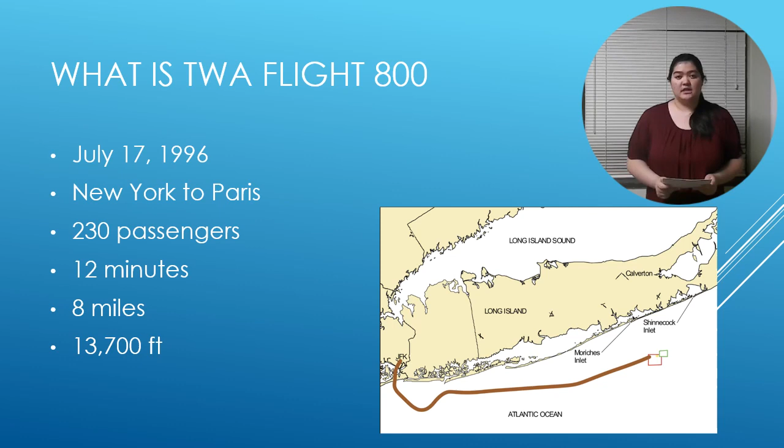The center section, shown in red, fell first. The yellow section, the forward fuselage, soon followed. Finally, the rest of the plane, shown in green, struck the water.

Newspapers across the country reported on the incident, especially the witness reports stating how a streak of light hit the plane just before it fell. A 10-month diving operation recovered 95% of the plane remnants. In order to decipher what had happened, the plane was reconstructed to the best of its ability.

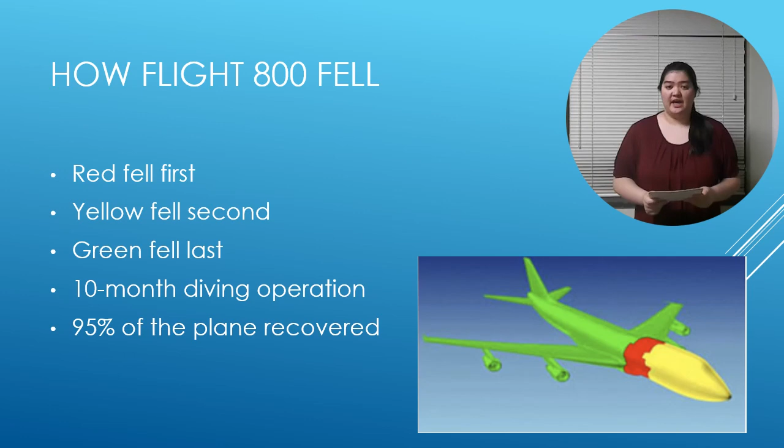The National Transportation Safety Board, or NTSB, launched its investigation as soon as the pieces of the plane were accessible. The NTSB initially reported 3 possible causes of failure. The first was structural failure and decompression. This was quickly ruled out due to there being no corrosion, metal fatigue, or structural faults.

The second possible cause was the detonation of a bomb or missile. However, there was no evidence to support this theory either. There were no holes indicating the penetration of a missile, and no localized area had any more severe damage than another. While there was trace residue found in the plane, this could quickly be explained by past uses of the airplane. And the light trail witnesses saw could have been burning fuel falling from the plane.

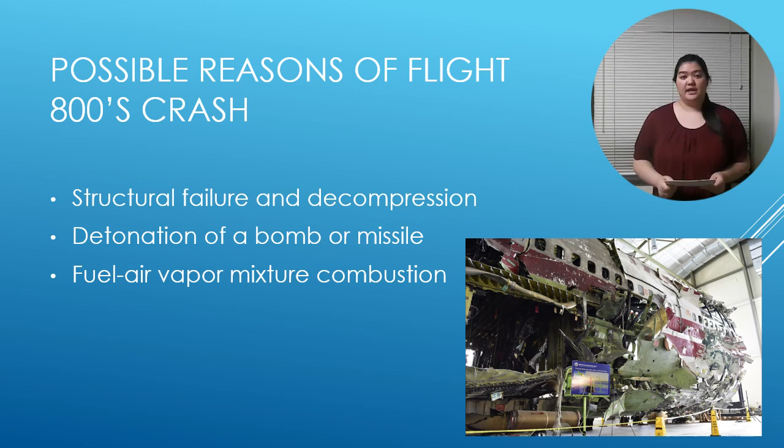The last theory was fuel-air vapor mixture combusting in the wing. The wreckage displayed that pieces of the center wing tank were ejected first. Overpressure in the tank was the first in the sequence of failure. This overpressure was deduced to be caused by the fuel-air vapor mixture combusting in the wing tank.

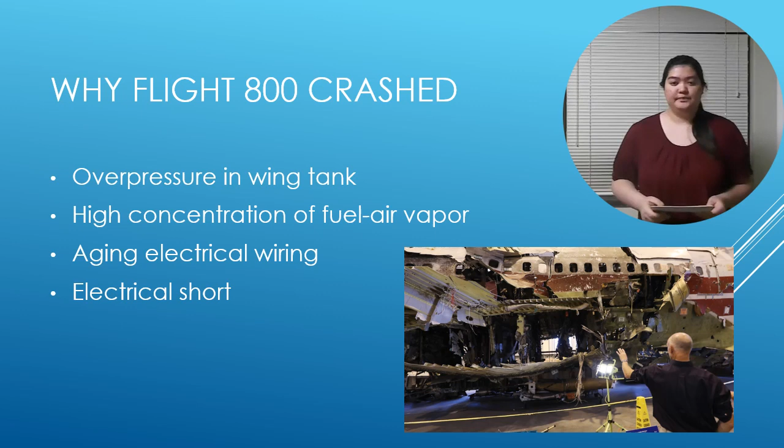The Aircraft Engineering and Aerospace Technology Journal reported a high concentration of the flammable fuel-air vapor mixture in the wing tank. This, combined with the aging electrical wiring, were the catalysts. There was an electrical short in the wiring that ignited the fuel-air vapor mixture, causing the explosion that brought down the plane.

The NTSB explains how there were no maintenance practices protecting the integrity of the wiring. The Federal Aviation Administration explained how there was a supposedly explosion-proof tank design. This tank design accounted for fuel temperatures and limiting ignition sources. Part of this, explained by a journal of failure analysis and prevention, included keeping a low electrical current in the wiring close to the tank. This system did not take potential wire shorts or vapor buildup into account for its explosion-proof tank design.

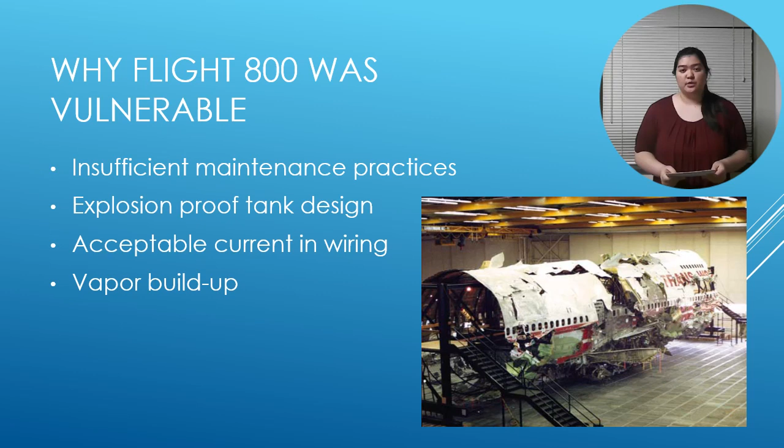My name is Owen Kinnick, and I will now be discussing who and what was affected by the flight, design decisions that led to the crash, and ethical questions posed by the disaster.

For all 230 people aboard the flight, it affected them in the worst way possible. They are no longer with us. And for all their friends and family, the flight and its crash still affects them to this day.

There were no planes grounded following the crash, as happened with the Boeing 737 MAX jet recently. It took the FAA 10 years to mandate any design decisions or specifications for airplanes that would help

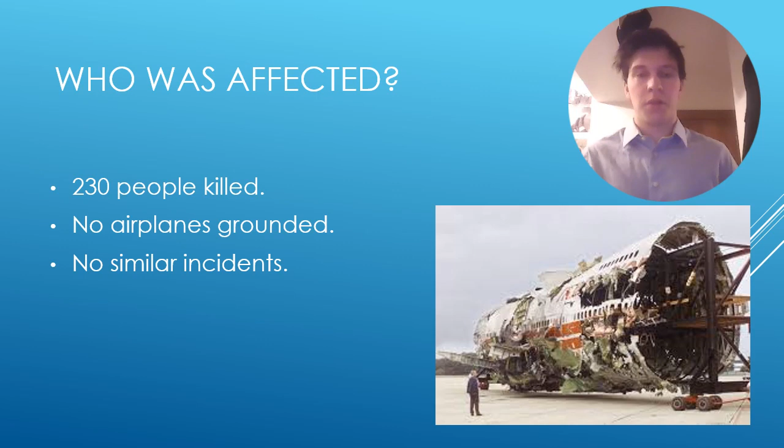prevent situations like this from happening in the future. In 2000, nearly 4 years after the crash, the NTSB released a 350-page report detailing the crash, analyzing evidence, and discussing possible causes of the crash.

As Livy mentioned earlier, they were able to rule out a missile strike and structural failure. They determined that the crash was most likely caused by an explosion of the fuel tank due to increased fuel vapor pressure and a spark caused from faulty wiring components.

They also determined that everything was up to code and properly maintained on the flight, so there was no human user error that caused the crash.

So is this all bad luck and coincidence? Why did this plane crash? Why weren't these issues taken into account?

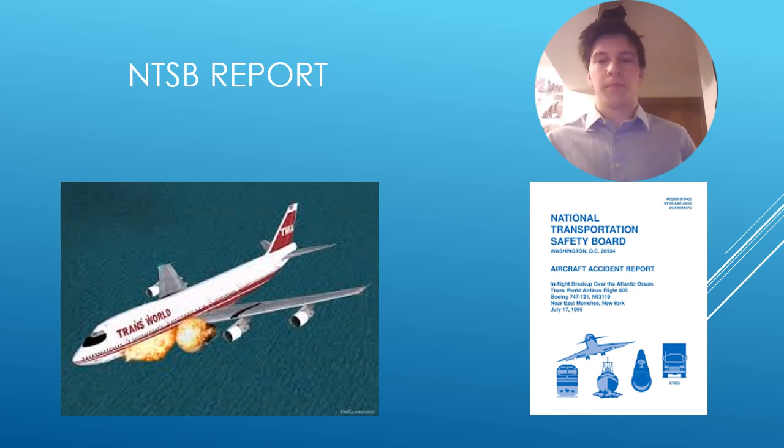We can begin by discussing the airplane fuel tank design. The engineers who designed the fuel tank claimed that it was an explosion-proof design, but they only assumed that because they thought they could assume there were no possible ignition sources.

The tank was, in theory, still flammable. They didn't design it to not be able to explode. They just assumed that there would never be an ignition, never a spark in the fuel tank.

This is an incredibly flawed assumption to make. It's impossible to rule out all possible ignition sources. Something could happen, as it did in this case, that caused catastrophic failure.

It seems like the type of assumption we'd make in an intro-level engineering class when trying to solve a complex problem, but we're not then getting a super precise answer. You can't make assumptions like that when you're designing a system that absolutely cannot fail.

If it fails, it leads to the death of hundreds of people. The engineers made a mistake in designing the system this way.

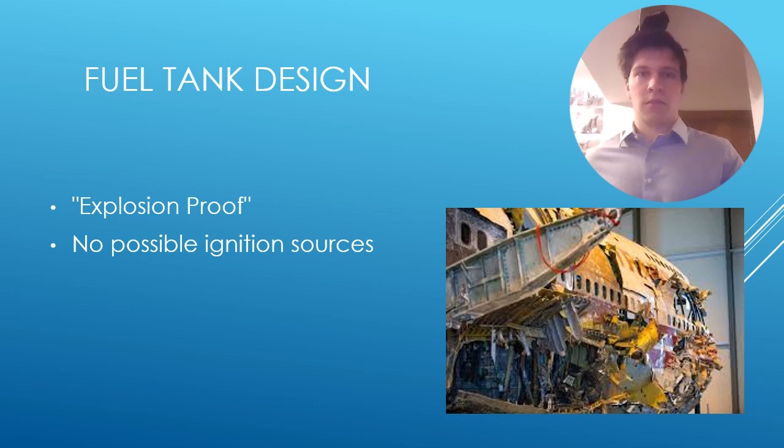Continuing to discuss the fuel tank design, another flaw was that the engineers designed no way to reduce the flammability of the fuel tank. This was an easy problem to avoid because the military had developed a solution decades before.

Military airplanes really do not want to explode. They're constantly being shot at, and if a bullet passes through the fuel tank, there's a very high likelihood it could explode because of all the flammable vapor in the fuel tank.

So the military designed a way to reduce the flammability. They would inject inert gas, usually nitrogen, into the fuel tank, which lowered the oxygen content from around 21% all the way down to 9%.

This meant that the vapor in the fuel tank was much less flammable and the airplane was much less prone to exploding. But commercial airline designers thought this wasn't really an issue because commercial airplanes usually aren't getting shot at by other airplanes or things like that. So they overlooked this step and decided that adding this part to the fuel tank was not necessary.

But it turned out that if this had been the case, it may have prevented the crash of Flight 800. It took the FAA almost 10 years after the crash until, in 2008, they mandated a system like this be installed on all new airplanes. But it took 10 years after the crash for something like this to be implemented.

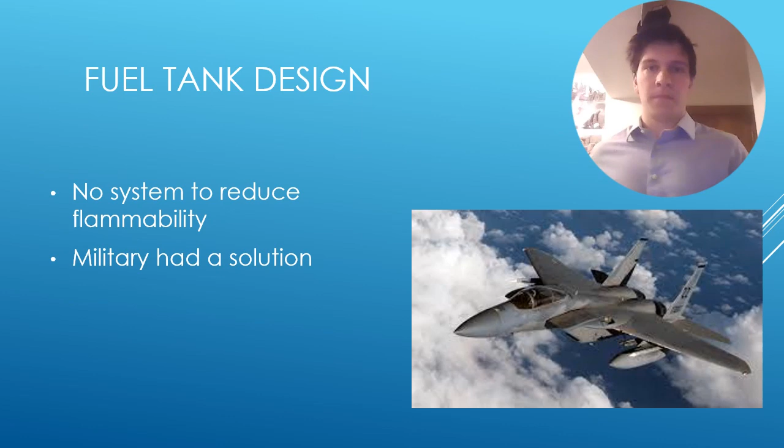Given these two major design flaws, it seems as if proper engineering could have easily prevented the crash of Flight 800 from ever occurring. But there have been no similar disasters since 1996, and there was only one similar incident that happened before. So was it actually worth it?

Would it have been worth it to spend millions of dollars designing and implementing solutions to this problem when it could have saved the lives of only one plane? Obviously, it seems worth it to those who were on board the flight who are no longer with us, and their friends and family. But maybe it wasn't worth it to the executives and people making decisions at airplane manufacturers and airlines.

My name is Chase Peterson, and I will be talking about the consequences of this disaster and the risks involved in not following improvements made as a result.

After the largest investigation in the history of the NTSB, some recommendations were given to prevent anything like this from happening again. They include: look into manufacturing practices of fuel tanks and how components inside are kept from being ignition sources; review design specifications for wiring systems that are critical to safety and ensure adequate separation from those systems; develop practices to minimize silver sulfide deposits that could cause risk for ignition; improve training of maintenance crews to recognize potentially hazardous wiring systems or wear; improve documentation and reporting of wiring conditions; and incorporate technology as safety mechanisms for wiring failures.

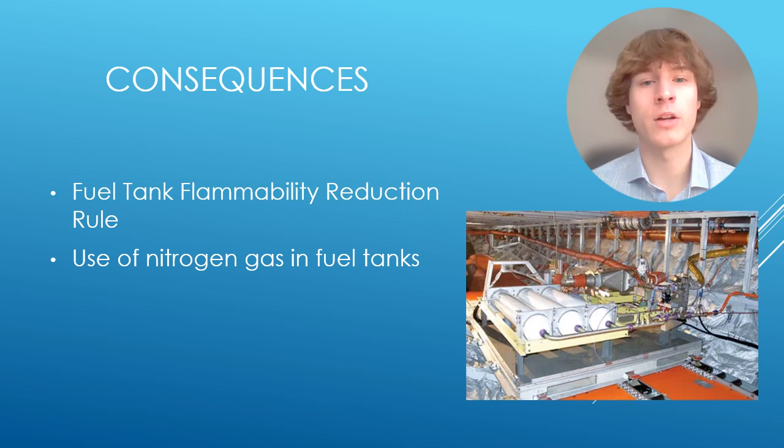If airplane designers and manufacturers today try to cut corners, there will be no positive outcomes for them. There are countless safety risks, from design oversights, lack of safety mechanisms, maintenance failures, and aging failure. That lack of safety or trustworthiness in a company will dissuade airlines from buying those planes and passengers from flying on them. The monetary loss from both fewer people wanting to use those planes and from possible fines and liability for failing to follow regulations would be immense.

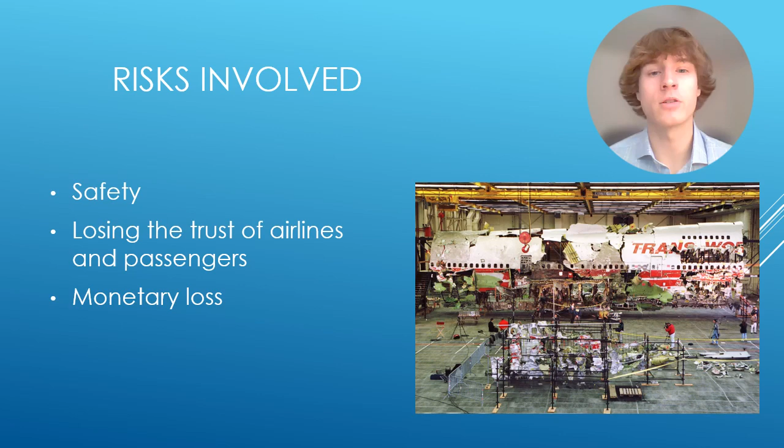From our research, no party was held legally accountable for this disaster, as it seems to be more of a freak accident than a result of overt neglect or carelessness. However, that does not mean there are not lessons to be learned or improvements to be made.

Maintenance codes from the FAA that required more thorough inspections, especially of aging aircraft, and better documentation, in addition to precise attention to detail from Boeing, may have prevented this disaster from happening.

An important lesson to be learned is that there can never be too many safety precautions taken when designing and maintaining a passenger aircraft. After these improvements and lessons, we can hope that today our planes are going to continue to be safer and more reliable than ever. Thank you.